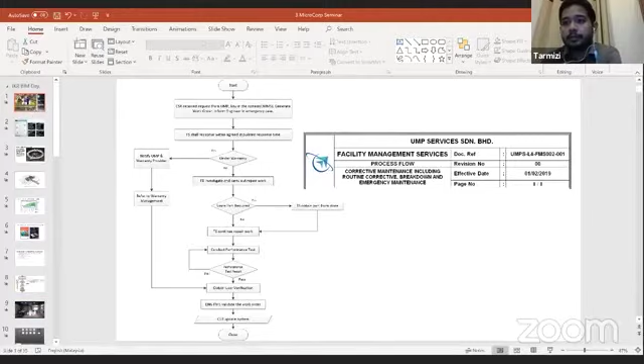Okay, thanks, Mr. Sharain. So, can you guys see my slide there? Can you put on the projection? Oh yeah, good, okay. So, quite a nice topic actually, Catch Me If You Can. I just picked the Catch Me If You Can movie scene and put it there, because the information in a project can be a curse or can be a blessing, depending upon how well we manage them.

So before we start, I need to explain a bit about our BIM formation at UMP. Basically, since the early beginning of establishing BIM at UMP Holdings, we didn't set it up under the university, but rather under the spin-off company of UMP, which is UMP Holdings, because the nature of the jobs we keep receiving is more towards industrial-based rather than academic research-based. So ever since 2014, we've been focusing on training and education, organizational transformation, project and consultancy, and research and development.

So the initial idea of setting up BIM at UMP Holdings was because UMP Holdings itself is the asset owner for UMP. The Gambang campus is owned by UMP Holdings, whereas for the UMP campus in Pekan, we have two campuses. Pekan is owned by UMP, but UMP Holdings is the facility manager for that particular project. So the initial idea was to structure all the data in a BIM format so that we could manage the asset properly. That was the idea back then, in 2014, 2015.

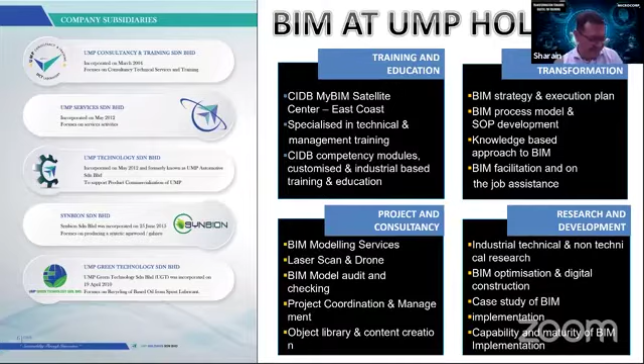Before we go further, I'm not sure of the demographic of participants tonight, but I want to recap the definition of BIM used in Malaysia. Basically, it's a much easier definition. We want to ensure the entire supply chain of project delivery uses model-based methodology, where BIM becomes, I would rather say, a Tupperware where you store information, a container of information. If you store the correct information, you can retrieve the correct information. But if you don't store the information inside the Tupperware, you can't retrieve anything from there.

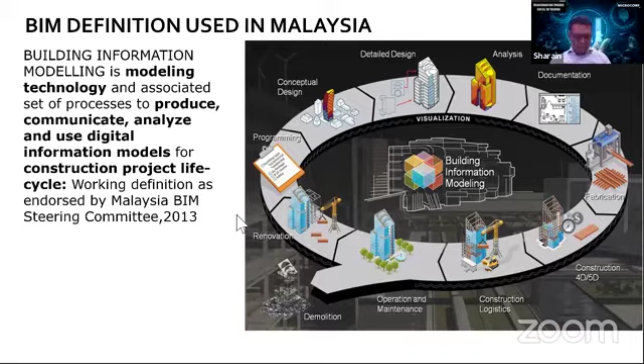Okay, next. So BIM in operation and maintenance, because currently we are looking at two major standards.

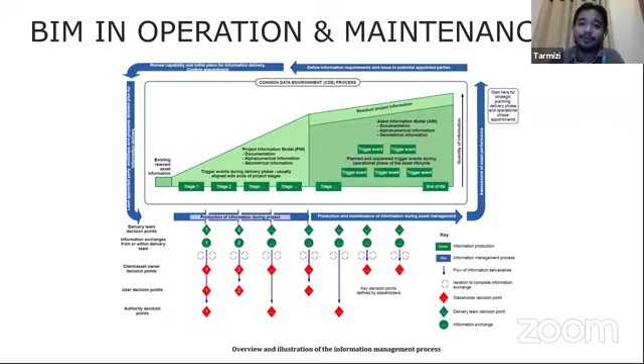Either we want to use PAS 1192 by the UK standard, or the latest one, ISO 19650 standard. But I haven't used 19650 yet, so I can't really talk about that one much. Rather I'll talk about the MyBIM requirement, because since we are managing government assets, most of our methodology is based on Public Work Department methodology.

So BIM standards used for FM in Malaysia currently look at two different methodologies, either PAS 1192 Part 3 or the MyBIM requirement. Since this is only a 15 minute duration, I will only focus on BIM used in operation and maintenance. So far we're still at the evaluating stage of which platform we want to use. We're aware of how powerful Archibus is.

We've met many times and reviewed things, and still, in our point of view, it's much better if we manage to digitalize all the data first before we invest in procuring a platform to manage our assets.

In our operational maintenance, FM itself is a very big aspect. Some might call it O&M, some might call it FM. But what I'd like to focus on tonight is just documentation and record keeping, focusing on integrated digital assets, and then looking at this methodology.

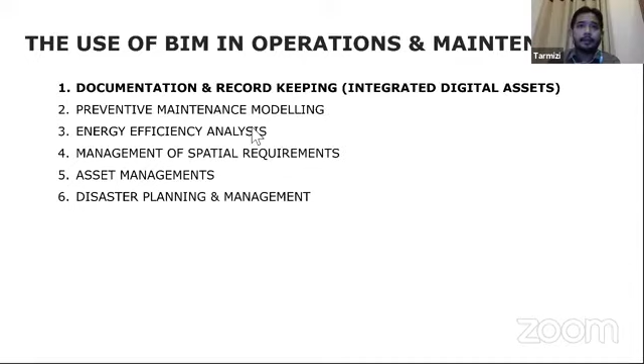The challenges of managing university assets include dealing with quite a lot of... I can't recall the word... because we have so many students, so many users, somebody tries to break down something, they enjoy breaking things. I forgot the term - vandalism, yes. We're dealing with quite a lot of vandalism as well.

So when something gets vandalized, this is not within our contract, so the client cannot simply deny our claim request because certain things are beyond our scope. Because of that, we need to properly record all data information, and paper-based documentation is no way we can do that. So going back to this process flow, when we receive the work order from the logger, we first check whether the complaint is under warranty or not.

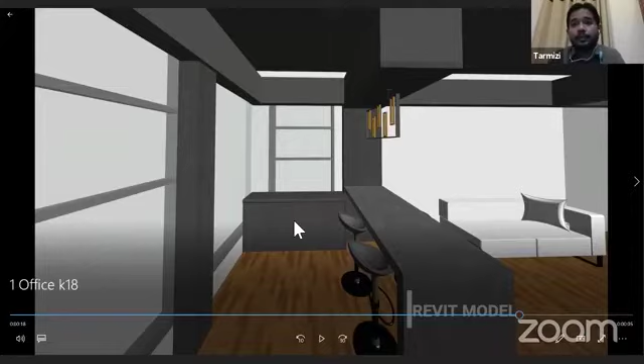So we still need to have the Revit model, so all the data and information is stored and populated inside the Revit model. The first layer is photogrammetry, then the second layer we have a point cloud. To get further detail on requirements, we need to open up our Revit model. That's basically how we do it.

The whole idea is actually utilizing the model. Okay, then another one. Can you still see the video? Yeah, now we are seeing your Revit file.

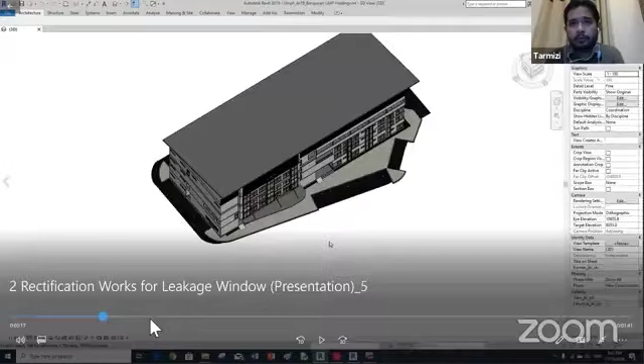So from the model, once we already identify the location of the problem, the next stage - this is the model that we have here. Then we can go directly to look at the room that we have identified. So under the room there...

We can go directly and click on the windows there. And then you can see, because we are using Mascata requirements, this is the template of Mascata provided by the Public Works Department or JKR. So all of the information is populated according to the Mascata requirement.

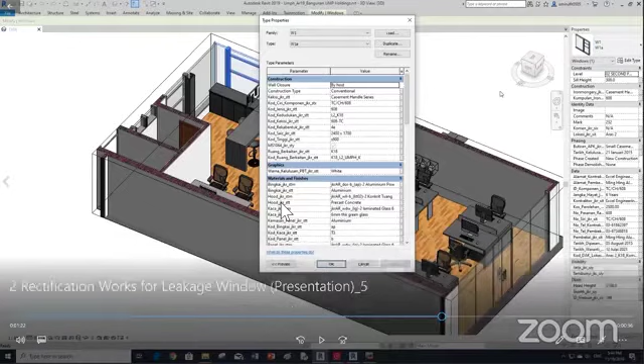So later when we want to extract the schedule, it becomes much easier.

Hello? Okay, it's okay, no problem.

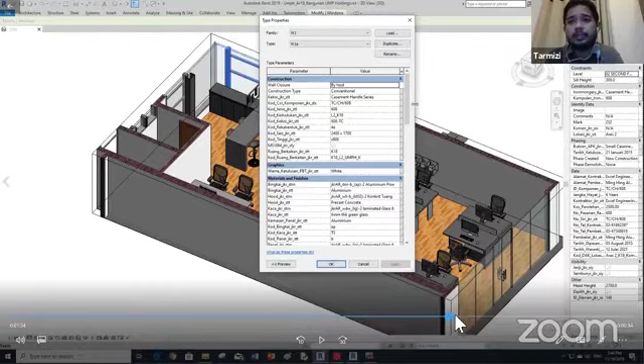Certain information that we cannot embed within the Revit model, like a catalog or spec, because if we put the catalog or spec inside the model, the model is going to be very huge in terms of capacity, in terms of file size.

So we also embed links. Most of the catalogs we put on the drive. By simply clicking on the drive, it will direct you to the original catalog of the component. So you can see from there.

So there's a way that we use to capture and manage back the information. But what we've shown here is still looking at the manual approach of managing the asset and information by using BIM. Currently we are at the stage of converting all the files into Revit format.

Once we achieve that, we don't target all of it - it's going to be very crazy to target all. Go for a quick win instead. Yes, quick win. So we targeted around 20% of the assets being digitalized.

Then we're going to decide which platform we're going to acquire in order to manage all this data later on.

I think it's a good initiative to convert the BIM or the physical information to digital nowadays.

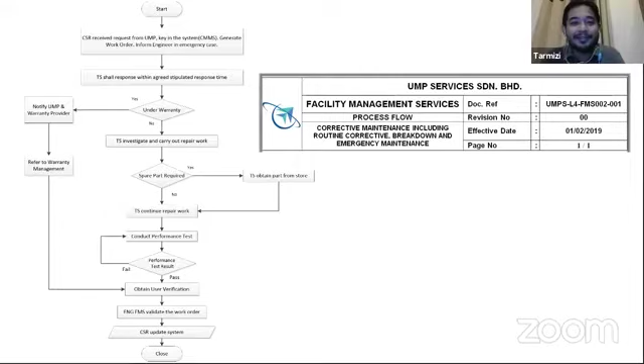Then I saw Haris Mansoor as well as a participant there. Yes, so we collaborate with Haris Mansoor, using their product to do the laser scan for our projects.

Well, are you moving towards laser scanning nowadays, Haris? Yes, okay.

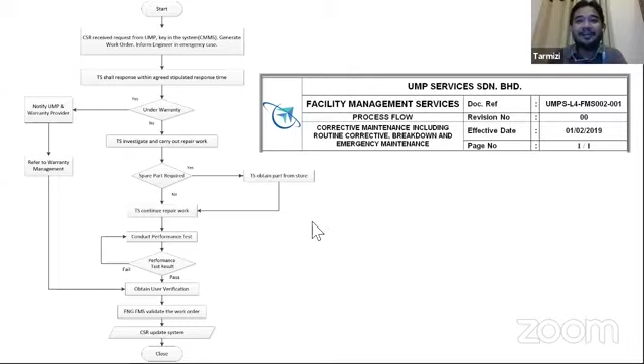So that's basically the idea. So this one is just we want to test by using drone and everything, but really this one for the marketing modeling only, not as good as what we can do in order to manage the data.

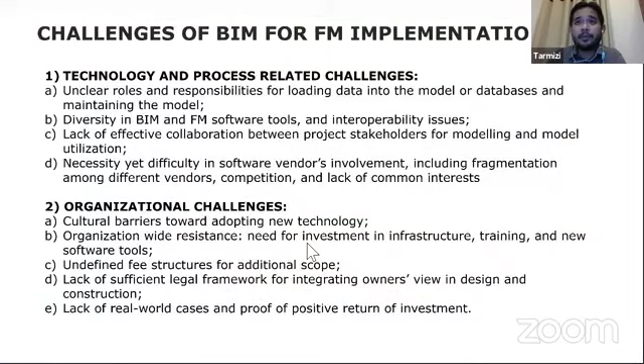The challenges for BIM for FM implementation that we can see is first the technology and process related challenges, where we don't have a clear role and responsibility for loading data into the models or database and then maintaining the model itself. Especially when you come forward during construction, hand over to the FM facility manager contractor.

And then diversity in BIM and FM software tools and interoperability issues. Certain FM software just only require the format of Excel only. Even when we're talking about COBie format, it's basically Excel format. We call it the Excel system.

And then lack of effective collaboration between project parties for modeling and model utilization, and necessity yet difficulty in software vendor involvement, because most of the FM software require a lot of customization, to be honest. We can't do it ourselves. Then we have to rely on the software vendor to customize our workflow - there's a huge challenge there.

Whereas for the organizational challenges, we still have cultural barriers towards adopting new technology, organization-wide resistance, need for investment in infrastructure, training and new software tools, undefined fee structure, and so on and so forth.

So basically, when we try to push forward this methodology, we can't expect all the people in FM to read the BIM model from Revit. No, we can't. So what we do is assign a dedicated person to look after the digital asset. We name it as a physical asset, and then the other one is a digital asset. So there's a team looking after the digital asset.

It's required, you know, because it's different. And then the true problem that we're facing right now is fabricated as-built drawings that contribute to inaccurate data information. Yes, we have as-built drawings, but we really doubt the accuracy of as-built drawings. In fact, when we compare certain as-built drawings, there's nothing much different as compared to the construction drawings.

So because of this issue, we try to embed this methodology. What if we get involved early during the construction stage in order to capture the construction information, convert it, update it to become the construction model, and later on update it again along the way to become the as-built model.

Ideally, people will say this is the best methodology. Yes, we agree this is the best methodology, but it doesn't seem as easy as it sounds. So one of our projects in Terengganu, MBKT, information capture - just to throw in a bit of what we did there.

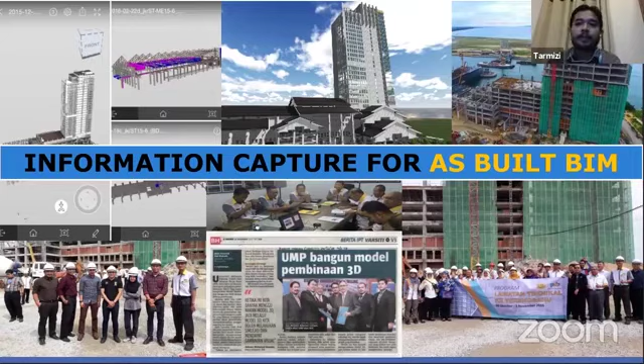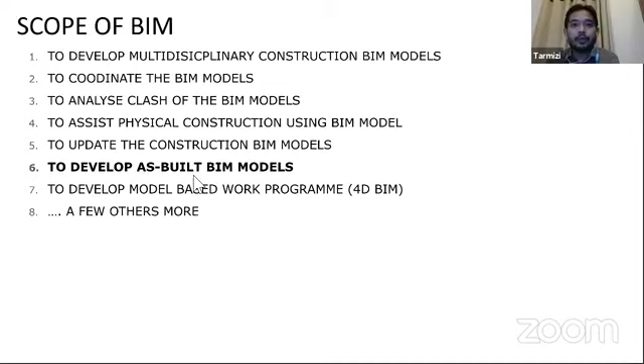One of the scopes within the project is we need to develop the as-built BIM models. There are many scopes - this is just something I can summarize. So to develop the as-built BIM models, this is part of the strategy that we use in order to embed within the project. There are two different things.

If the asset is already completed, the coordination doesn't happen much complicated because we're only dealing with whoever owns the data information. But when it comes to project delivery, we're dealing with live data, live project, and live involvement of many people. So we need to have a BEP, we need to have a collaboration plan.

Also, the most critical part is Revit best practice. It doesn't matter which methodology you want to engage, it doesn't matter which template you want to engage, but it must be consistent along the way. You cannot simply use one methodology at the design stage, a different methodology in construction stage, and later on a different methodology at the FM stage. So the data won't be nicely managed if you do it that way.

So we can have so many methodologies, but the moment we get involved in the project, we have to agree to one methodology only, so that it can make everybody's life easier and much more happy to get involved in the project. Okay, so this is a general approach that we want to implement BIM.

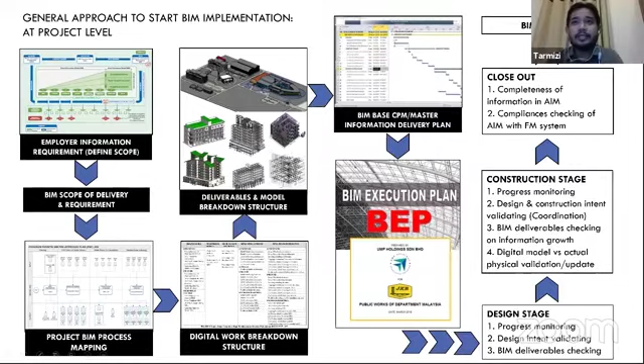So I'll just keep this one because I already have 15 minutes there. So this is the process flow that we use in order to deliver the BIM methodology. Because if you look at here, we have input, we have process, then we have output.

We really need to track where the input is coming from and the accuracy of the input itself, so that the process can be delivered accordingly, and later on the output that we want to produce can fit back to the client's needs and requirements. And then this one's more towards the requirement that needs to be part of the compliance of the submission to the client. So by having this methodology, it makes our life easier to coordinate with our project team.

But there's a big but there. We thought it's gonna be easy, but if people don't refer to this process model, it will be as good as nothing. This is another challenge we're facing. Some people keep coming and going, and when new people replace them, they don't even know how to read this process model. Now and then we need to train the entire project team how to read it, what stage we're in, and their roles and responsibilities, even though everything is stipulated within the BEP. That's a different issue, okay.

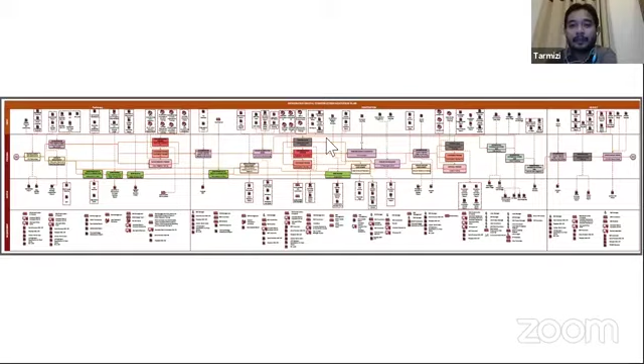So this is a more clear view of the process model, step by step. Because by having this on there, everybody knows their roles and responsibilities, and which part they need to produce as an input, and which part of the deliverable they need to extract out of the model.

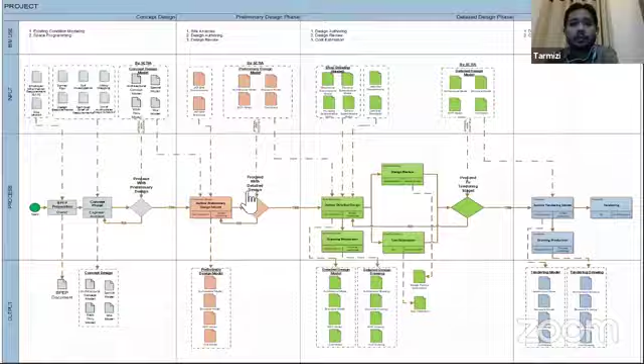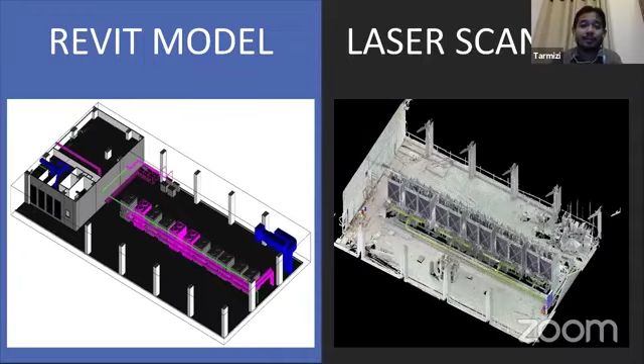So these are the laser scans that we use to capture the image. Remember, laser scan simply captures the geometrical data. The information, the specification, needs to be updated manually again. You need to extract from the specification, enter it, punch it into the Revit model, and that's it, the process. So this is some of it.

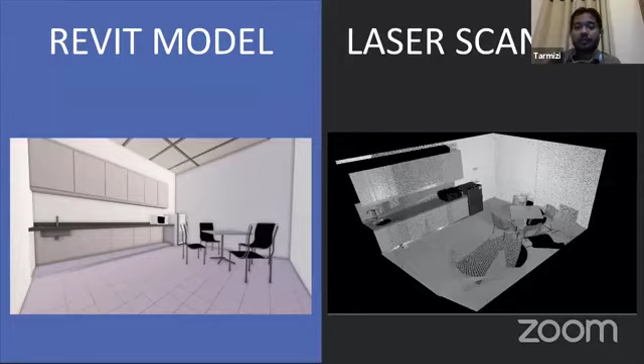Then people said, oh, if you capture early during the design and construction stage, you can capture all the mechanical systems, isn't it? That's what people say. So here's what we encountered: how are you going to put the laser scan there? The moment the scaffold goes up—I thought you wanted to scan the scaffolding—no, it won't look nice in the digital model. Then the moment they dismantle the scaffold, the ceiling is already closed. Yeah, then it's too late already. Again, we're repeating the same problem.

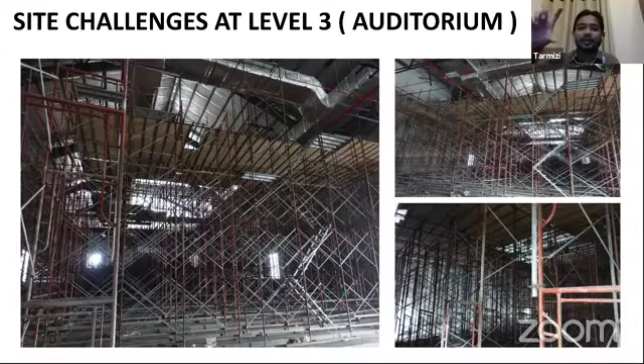So this made me think it's almost similar whether you capture the data during construction or after construction, because towards the end you still need to open up the ceiling using a smaller version of the scanner and put it above the ceiling. It's another cost, you know? Yes, you have to open the ceiling.

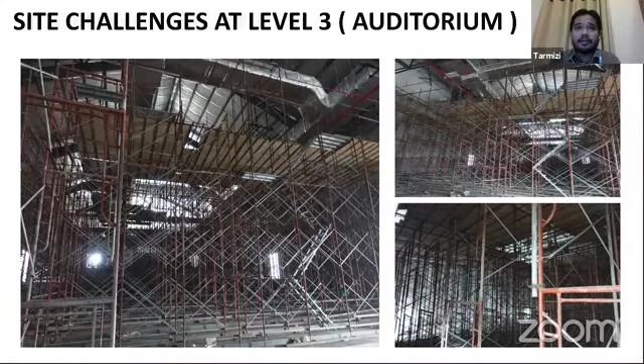One of the few challenges we face during the construction stage is post-processing data quality. Sometimes when we capture all the scan data and bring it back to our office, certain points are missing, and we need to go back to the site to capture them. Then there's post-processing equipment and software, time duration, data accuracy, and data relation for the as-built model as well.

Then that's all for my part. Yeah, thank you, Dr. Tarmizi.

Yeah, it's great, it's a good effort to start digitalizing your information first. You know, it's like our journey those days. We started our BIM for FM activity when we were given a project to redraw it back in BIM and transfer it back to FM. So we feel you, we know how difficult it is. We did it in 2010 for one of the government buildings. So it was really difficult, you know, and during those days laser scanning wasn't yet matured, you know. So yeah, thank you Dr. Tarmizi for sharing, good experience, good challenges that we shared, you know.

Okay, I think now you'd like to have a view from Mr. Ronan. I'd like to hear about it. I always call it linear asset management, you know, the train lines. So over to you, Mr. Ronan.

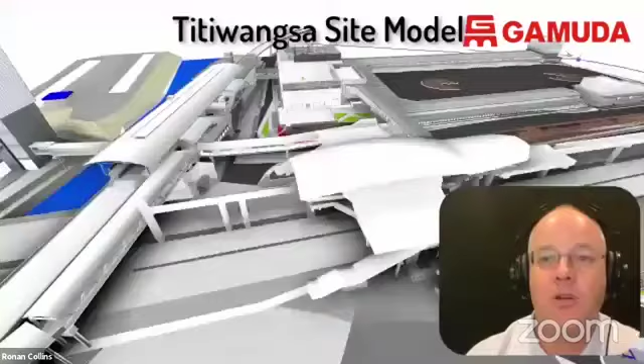So let me show you one example of what a BIM model looks like for anybody who has not seen one. This is a Revit model, actually shown in a piece of software called Navisworks. Here you can see the architectural systems - the ceilings, the interior walls, some of the balustrades. These are all the typical architectural details you will find in a BIM system.

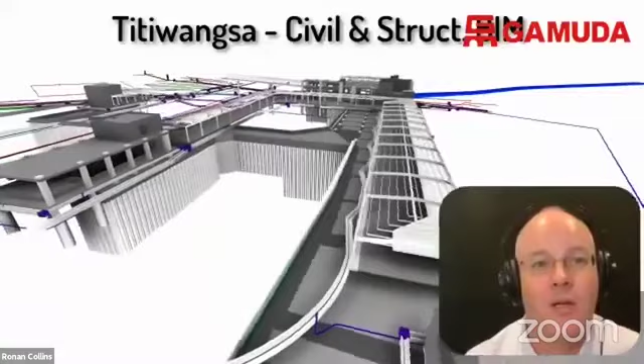This is a structural model - the diaphragm walls, the steel, structural steelwork. So all of this does not tend to end up in an FM system. It tends to end up in these kind of visual tools.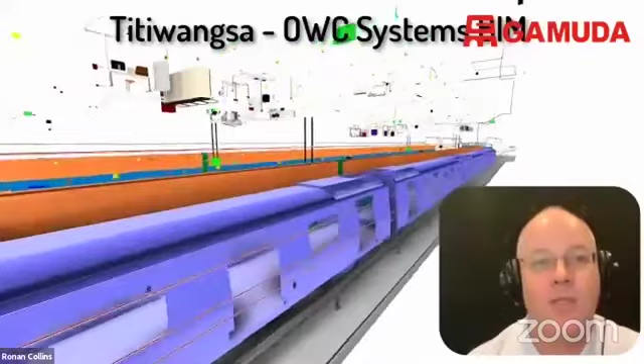What is in FM and is critical to facility management, particularly for these systems, is these live systems. So you've got air pressure pumps, water pumps, sensors, fixtures like fire hose reels, and then all the train operating systems - speaker systems, security systems, rail sensors, et cetera.

So the data that's required for the asset management tends to come from these very complicated models. And this is what we call a federated model, where we've taken all these different models and put them together.

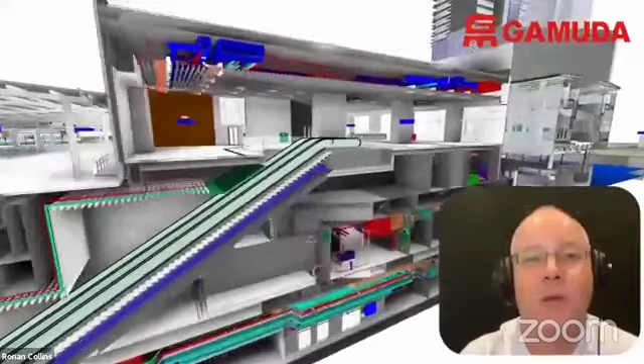Now, what you're looking at are models that were created by design consultants. Typically, design consultants don't get involved in maintaining facilities. In fact, I've met very few architects who actually go back into a building 5-10 years after they designed it to see how it's performing. So typically, the information that the architect puts in these models is useful for construction, but not necessarily useful for asset management. So one of the challenges we had on the KVMRT project was, how do we use these models to meet the MRT requirement for asset management?

So here you can see a very simple graph of what we have to do. Across the top are the stages of the project - classic railway metro project stages. You've got prelim and pre-final design, final design which is classic detail design and construction documentation. Final CSDs are when the operator systems are coordinated with the actual railway structure systems. Then you've got the as-built condition. And at the bottom of the screen, there is an absolute necessity for asset data capture.

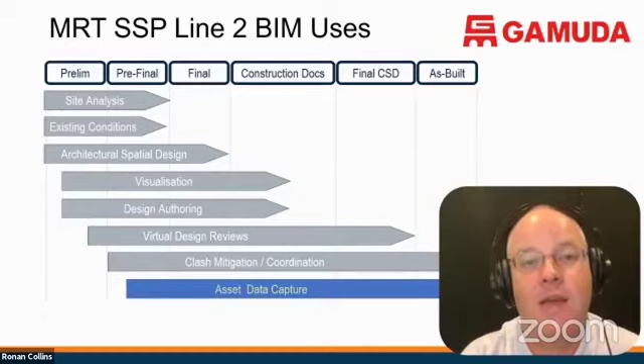The first thing you have to put in place is a very robust data management or project information management system. We call this the single source of truth, or a common data environment, CDE. On the MRT project, we're using a system called ProjectWise.

You could also use a system like Viewpoint for Projects or Aconex, but these systems require a couple of things. They need to track the logins of the people using it, and they need to link asset information to different attributes - documents, models - building a link between the asset information and the design information. This is why we don't want all the data in the models, but a way of linking the assets together.

You can see here a list of all the information we would typically store on this common data environment - the models, the design visualizations, and all the way down to the bottom, all the asset information for facility management. So the system has been designed as a design and construction tool, but also to collect the asset information for facility management.

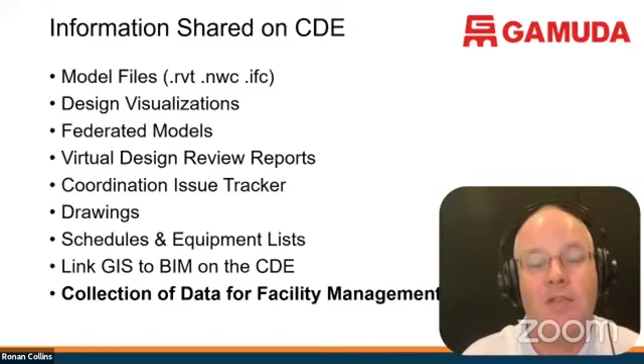So we have a client who specified what they want, we have models being built by the consultants, and we have a data management system that allows us to build a system. The next key critical item is that you have to have an asset management strategy, and you need a classification system.

It's not good enough to say we want the consultants to build the assets - we actually have to have a way of classifying them. A different way of looking at this: think of a library where you want to find a book - the index will be the genre, then more specific, eventually getting down to an author or number. So it's a numbering system, and the building classification system is exactly that.

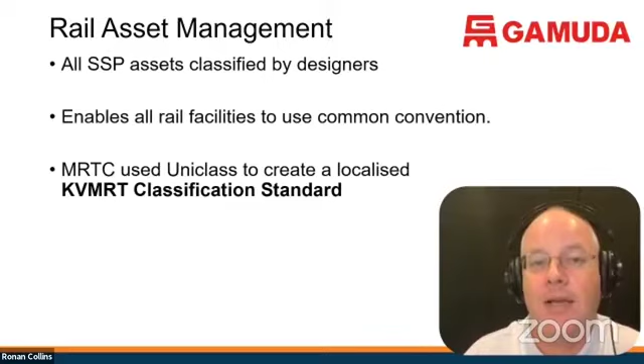The KVMRT are using a system called Uniclass. It's slightly modified for the MRT, but essentially it's based on this principle.

Every station is considered as an entity, and then inside that station, you have to manage the spaces. Facility management is based around spaces - if somebody calls up and says there's a problem with a particular facility, the first thing they'll tell you is what room or space they're in.

So it's based around spaces, then it's based around systems - you structure the data around whether it's a fire sprinkler system, a drainage pump system, an air supply system, a smoke extract system. And then you get down to the individual items that require maintenance and management - what we call products, which could be a fan, a light, a switch, a particular asset that needs to be repaired.

So essentially every asset in the building needs to have these four pieces of information.

Morning. Sorry, I'm having a technical difficulty - hang on a second, I've got too many screens open. Can you guys still see my screen? Yeah, can you share your screen, or do they need to pin you? They better pin me because I don't have a way of sharing my screen, I'm doing it this way with the software. It's better if the people on the admin side can just pin the view, it's easier, you can do that with Zoom. Yeah, I'll pin it. I think if someone jumps in, it gets a bit messy. Apologies if people have missed it.

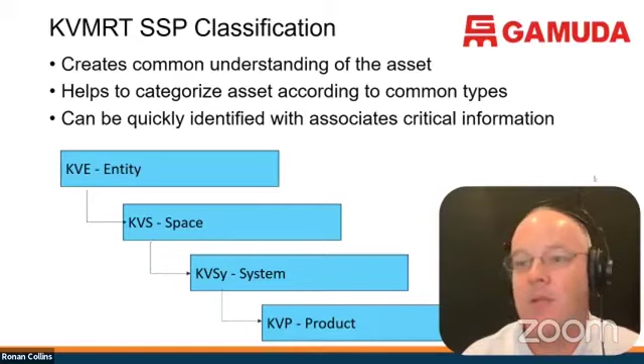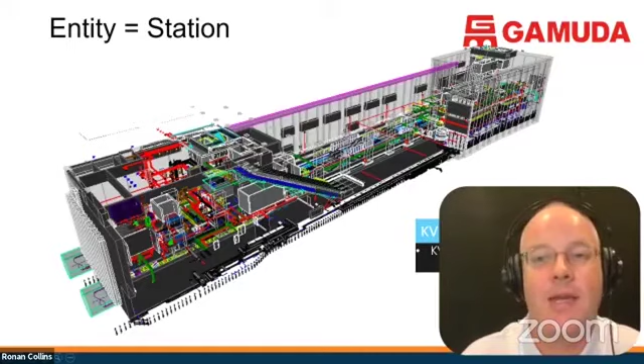So how do we do this? Let me show you a couple of examples. Here's an example where this is the actual entity - in this case, it's a railway station box, so it's given a code. These codes are not necessarily human readable, they're intended to be machine readable to make it easier to index and find information. There is always a text definition, but the codes are basically alphanumeric.

Then once you get into the space, there is already an existing facility management system in place in the MRT in terms of how they name spaces, so we've adopted that for naming all the spaces in the stations.

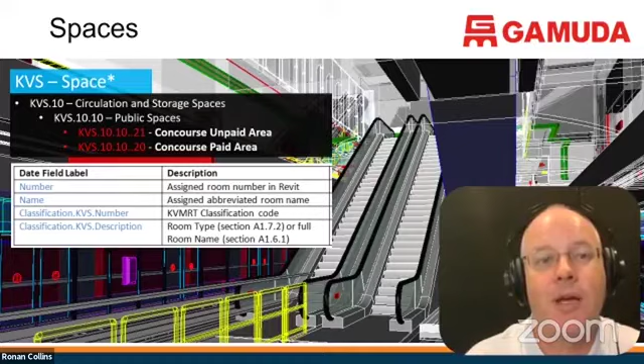For those of you who are Revit aficionados, we're using basically rooms in Revit architecture, or mechanical spaces in Revit MEP. Essentially, we're defining a space by an enclosed area, and then determining what elements are in those spaces. So then the systems go through all the spaces.

A particular system is an entire network. It's not limited to a space, but it's an entire network. In this case, it's a drainage system. When you look for a component in a space, you get right down to the definition of what all these different objects are. In this case, it's a cooling tower.

So this classification system is the backbone to everything else we have to do in terms of collecting data. Once we've identified and set up the classification system, this is put in by the consultants. As they place systems or objects, they have to classify all these products.

In our case, we had started modeling the project before this Uniclass system was finalized. So we had to go back and add in a lot of this classification information with the design consultants into the models. But the designers are responsible for putting the classification into the models.

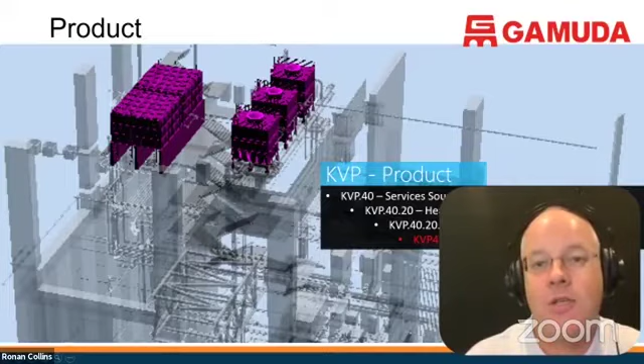The construction team are responsible for collecting the asset information required to actually run the facility. So we have to capture the classification system, the asset tag, which is a unique identifier, and then all this additional information—things like when it was installed, et cetera—and we have to collect it for all these systems.

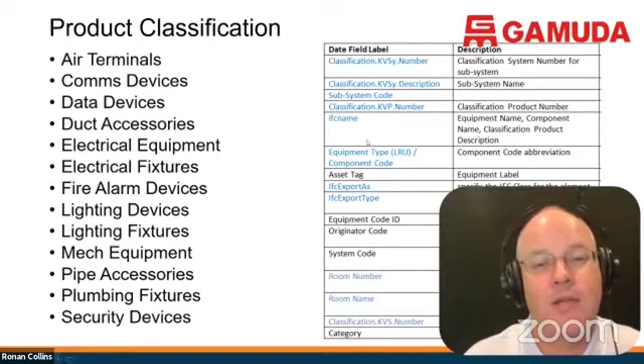Now, this is a massive amount of information. It's very dynamic, it changes all the time, or gets updated all the time. So we had to come up with a system for doing this in a sensible way.

We're currently doing a digital transformation of our business across all of our business sites. One of the tools we're using is a system called FieldView, a digital data collection platform. It allows us to create digital forms instead of paper forms.

We can have forms for purchasing permits, forms for quality checking in the factory, forms for delivery of systems to site, and forms for first fix, second fix, quality assurance, and progress reporting.

So we're digitizing the entire normal construction process of tracking the purchase, the supply, the delivery, and the installation of all the assets. By doing this, it allows us to capture all the asset data and link that data back to the particular assets in question. So we've digitized the system to collect the data.

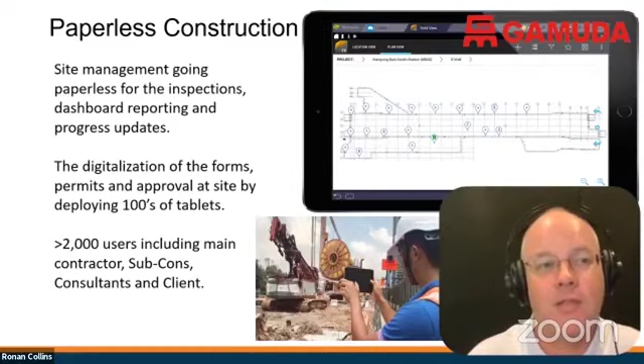That's why we keep the data separate from the models. This data is going into a relational database, and the link between the models and the database is through the asset identification tag. It's very important that this concept is understood, because with so much data coming in, you don't want to be pumping that back into a tool like Revit.

So in our case, we're doing all of these inspections, all of these site assessments for FieldView, and now we're using it for work inspections, installation inspections, and progress monitoring.

One of the challenges is, if you're going to collect all this data, how do you know you have all the data? How do you know what data is yet to be captured, and how do you know what data you've actually got?

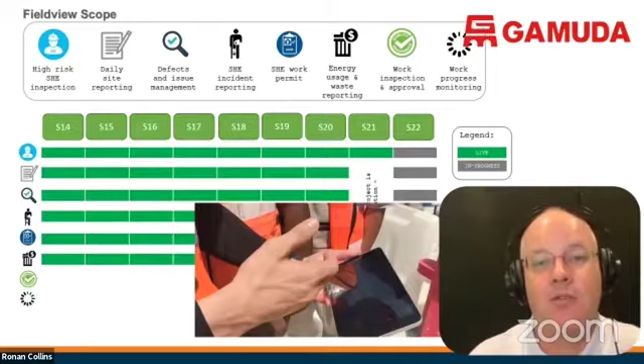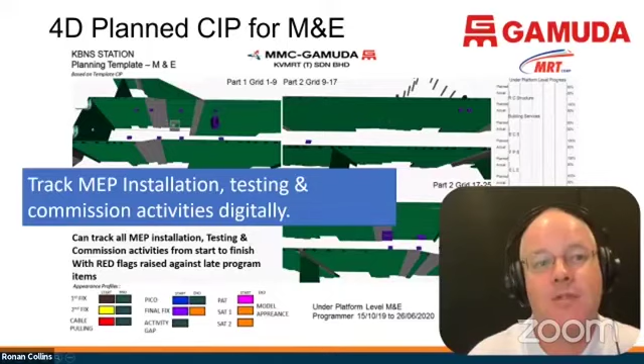So what we're doing is setting up a construction schedule which includes all the phases required for the actual MEP systems—whether that's the purchasing phase, the delivery phase, the testing phase, the commissioning phase, etc. Let me show you an example of what this looks like.

So this is what we call a 4D sequence, or a time-based sequence. In the bottom left corner, you can see the details, all the different systems coming in. Each of the screens are different views at the same level of one station, and you will start to see the E&M systems popping up.

What's happening is we've scheduled out every activity for every piece of equipment that has to be installed into the actual system. And then we've taken all of that information from the schedule and from the planning, and used that to set up all the check forms and the digital forms on the FieldView system.

So effectively what we've created is a checklist for every single piece of equipment that has to be installed, for every single test that has to be completed, and for every single handover that has to be done for every piece of equipment in the station.

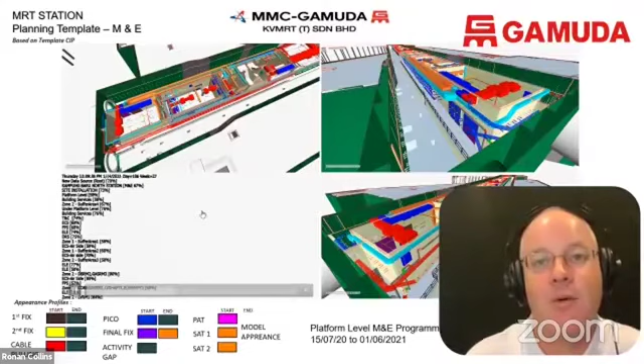So we're using basically the model as the basis for doing the planning. The M&E team are using their checklists, their procedures, their workflows to map out all the tests. And then we're using FieldView to capture all that in real time on the sites. So this is how we're managing the capturing of information during the construction phase, and all that information will then be passed to the MRT for operations.

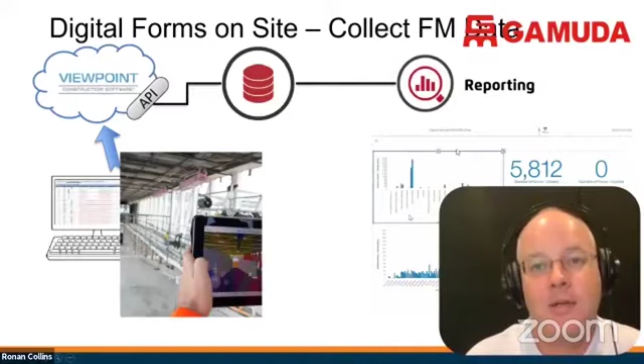So what that means in terms of a very simple workflow, we have guys on site using iPads and Samsung devices to capture the data, which is going through this Viewpoint platform. We're then using a database system to pull that information into our reporting system, which we pass on to the MRT system or MRT staff. So we're using digital systems on site to collect the FM data.

So I think that's about just short of 15 minutes.

So again, the key message here is that we're doing all this because the owner has specified the information that they want. The owner needs to define what they want. So they've done that in the recommendations, and our team in Gamuda have worked very hard over the last couple of years to work out how to do the system efficiently and effectively.

I'll just leave you one thought: the MRT Line 2 operations does not start for another 18 to 24 months, so we're still collecting the data. You're going to have to come back in 24 months' time, and I'll tell you whether we've actually managed to give all the data to the owner or not. But we're currently collecting all the data on site using these processes.

So I hope you found this useful, and happy to take any questions at the end.

Thank you very much, I like the idea. The owner is buying the information. The owner needs to define what they want. Yeah, it's good terminology, because when you want to buy something, you need to know what to buy. But when we have money, we know we can pay, but sometimes we don't know what to buy. Well, this is the problem. So sometimes they think they're buying a Ferrari and they end up getting a Proton Saga. So this is the problem. They have an interpretation of what they're going to get, and then there's a reality of what they end up with.

Yeah, nice sharing. Interesting, because I love to be involved in this linear asset management and have tried a couple of times. Like tomorrow there is one tender closing for, I think, Prolintas Highway. So they want to do that also, but they want to start digitizing from the GIS perspective, at the same time building up their BIM model for their toll plazas, and also build up all the six highways together.

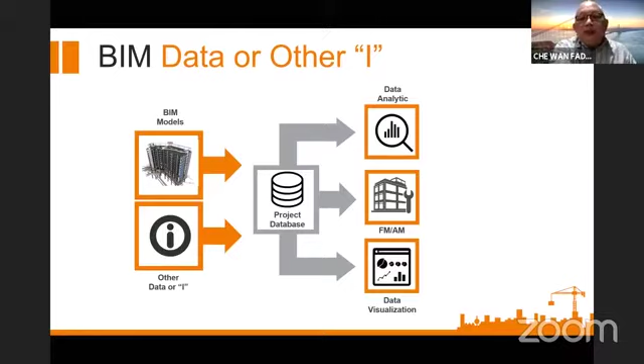So I'd like to share this angle because currently I'm working on the knowledge management part, which is actually the hierarchy from the data and information. I'm not going to talk more on knowledge management here.

I want to focus more on information management - how we collect it, process it, or how we store it. I think previous speakers mentioned a few important things, like the process model. I think Ronan, you mentioned about client...

I'd like to share also, because my experience is more from when I was working in a company in Abu Dhabi, where we put client leadership as a theme, and when we developed the so-called model that I'm going to share later.

I'd like to show this one because this is the project phases, and everyone knows about this. From the projects, we have EIR, the BEP, we developed the BIM model, and the project database. At the end, we come to the application where they want to use it for FM, asset, or maybe for another application.

As I said, my focus is on information management, so I'm more focused on these two parts, the beginning of the project. I did not say...

What I said is many people ignore this. But as I said, the EIR - when we mention the client giving a brief, everything - we have to make sure of the projects or the information that they want. I think Ronan mentioned about the client's responsibility.

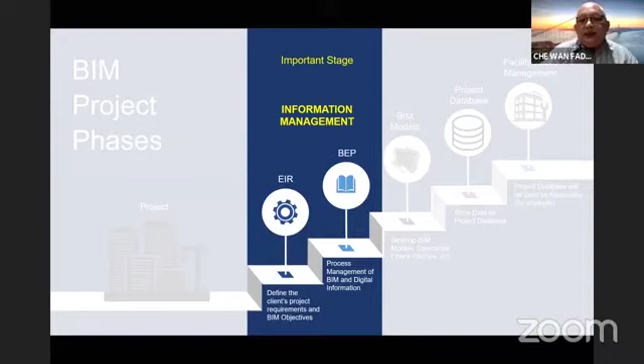It's very important. This is what we face when we put client leadership first - we always consult the client so they know what they want. Is it that they want? So before we proceed to the technology part, the website, or the model part, we want to make sure that at the end of the day, the data or information they want is available.

Okay, as I said, I want to share some experience when I was working in a company in Abu Dhabi as a manager before. We used an IDEF0 approach for the process modeling. I think process modeling has many methodologies - I think Tamizi showed them.

Okay, yeah, for us, one of the methods we use is actually used in mechanical engineering, called structured analysis design techniques. So we capture that - we use the activities, because we want to know what inputs, outputs, who controls the activities, and the mechanism used - for example, mechanism can be tools or software, or maybe some policies, depending on how we manage the activities.

And the beauty of this technique is that we can decompose it into many levels. Of course, how many levels is very subjective - it depends. If you reach the detail level that suits your objective, then we stop - maybe 2 levels, 3 levels, and that's it.

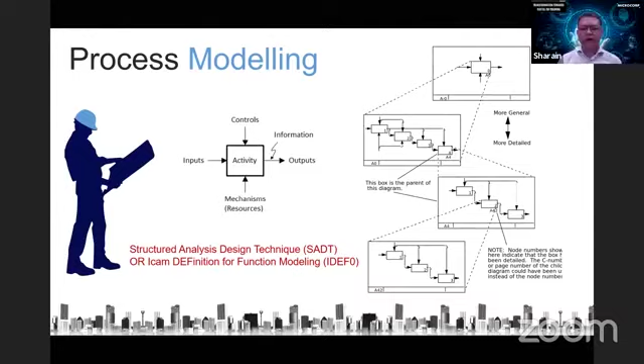So in case we have a problem in certain activities, we can zoom direct to the detailed activities, and we can check what input, what control, did they produce the output that we want, what mechanism is used. So if anything is missing here, we can check it straight away. We're working more on the paper base basically, it's not really the technology. We have a big A3, even sometimes bigger than A0 size paper, to make this model.

Another way we develop protocol is called a process protocol. This one we developed purposely for our clients, for the BIM, the phases. It's very big, so I'll zoom and focus on certain phases only. This model actually follows the model developed in University of Salford in 1998, but that one is for the conventional method. This one we developed for IPD, Integrated Project Delivery.

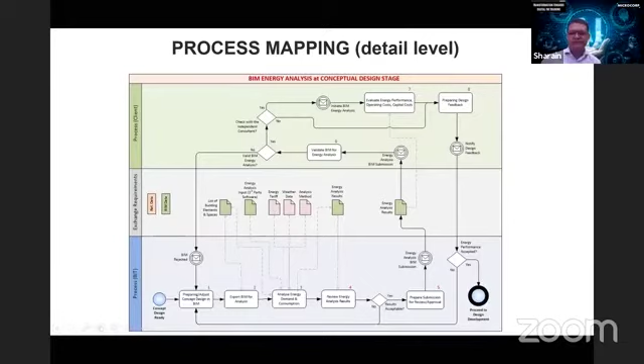So how do we check it? We use, for example, this process. It helps us a lot to overcome some of the problems, because we don't want, when it comes to the last stage here, the I part, the end part, to then have a big problem there. I think that's all.

I'll do a quick one, so unless, I'll open it for questions.

Thank you very much. Yeah, I like the idea of the step, catch me if you can, is this thing that people forget about the information management stage. Because maybe after we start involving in doing the models, we're so eager to see how the model looks like, then most of the time we forget the I, the importance of I.

Okay, thank you very much, Dr. Wan Fadil. I know that you have vast experience on this BIM implementation from your experience working outside the country. I think in Dubai, is it, Dr. Wan? Abu Dhabi. I was in Abu Dhabi. Abu Dhabi, okay, sorry, in Abu Dhabi. Yes, so interesting, because you came back with vast knowledge and experience on BIM, and started to join our local market, implementing BIM projects.